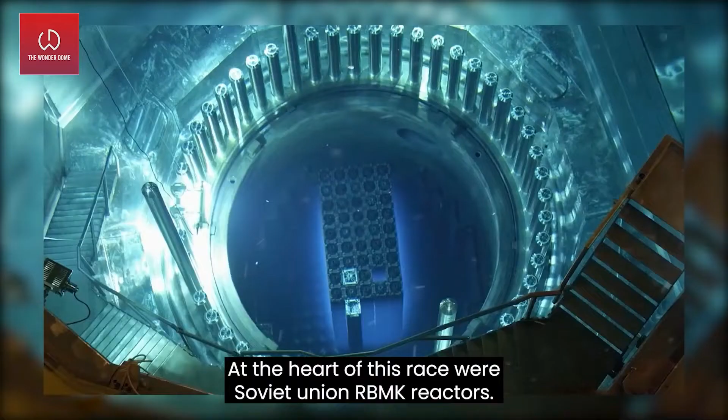At the heart of this race were Soviet Union RBMK reactors. These reactors used graphite for the nuclear reaction and water to cool down the core. At the time of the accident, the Soviet Union was using 17 of such reactors.

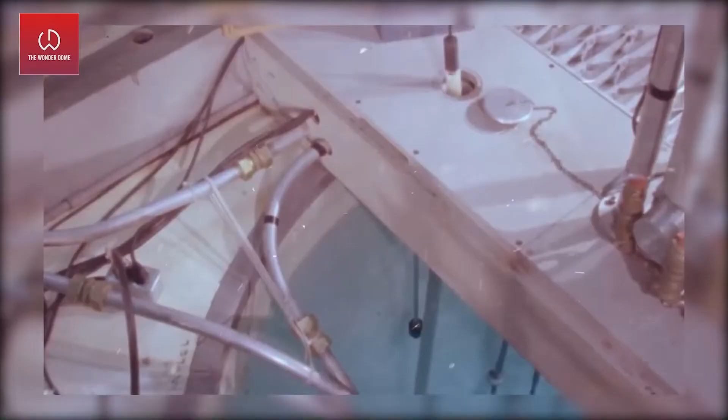On 26 April 1986, reactor number 4 in the Chernobyl Nuclear Power Plant near the city of Pripyat in the north of Ukraine blew up with a loud blast. At that time, the reactor was undergoing an experiment or a test. The plant was being run on only 7% power.

The test was being carried out to determine how long turbines would spin and supply power to the main circulating pumps, following a loss of main electric power supply. A series of factors, inadequate training of operators and faulty design of the reactor, contributed to the worst nuclear meltdown of human history.

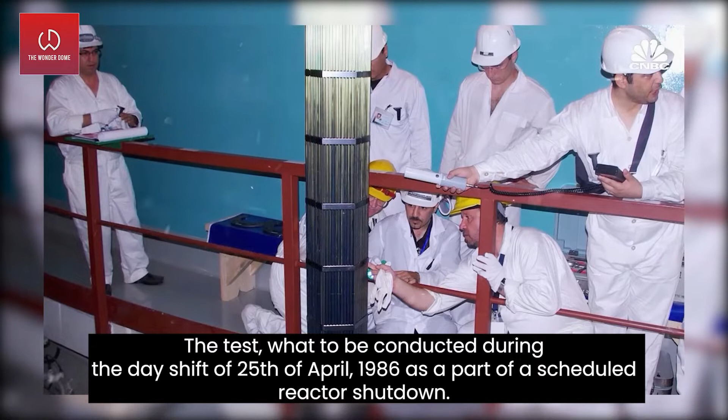The test was to be conducted during the day shift of 25th of April 1986 as part of a scheduled reactor shutdown. As planned, a gradual reduction in the output of the power unit began at 1:06 a.m. on 25th April, and the power level had reached 50% of its nominal 3,200 megawatt thermal level by the beginning of the day shift.

The day shift was scheduled to perform the test at 2:15 p.m., and preparations for the test were carried out, including the disabling of the emergency core cooling system.

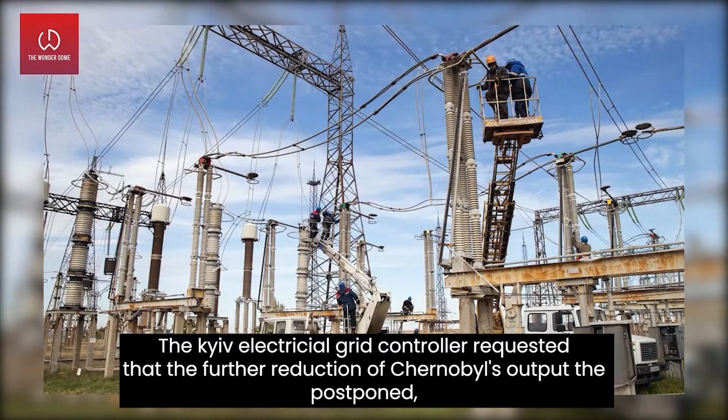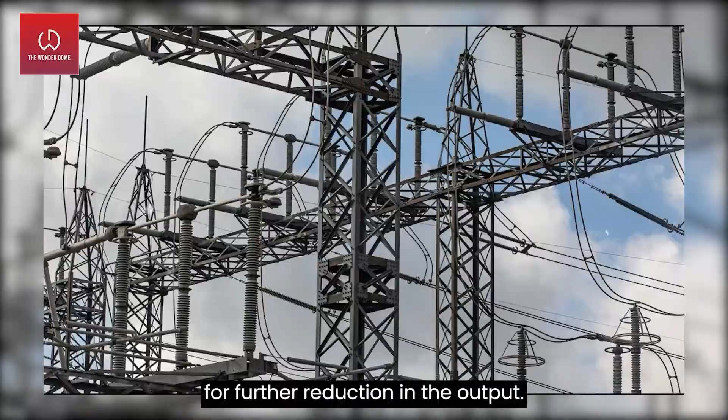But as nature would have it, another regional power station unexpectedly went offline at 2 p.m. The Kyiv electric grid controller requested that the further reduction of Chernobyl's output be postponed as power was needed to satisfy the peak evening demand, so the test was postponed. It was not until the night shift joined that the Kyiv electrical grid allowed for further reduction in output. All this time, the reactor was working without its emergency core cooling system and at a reduced power.

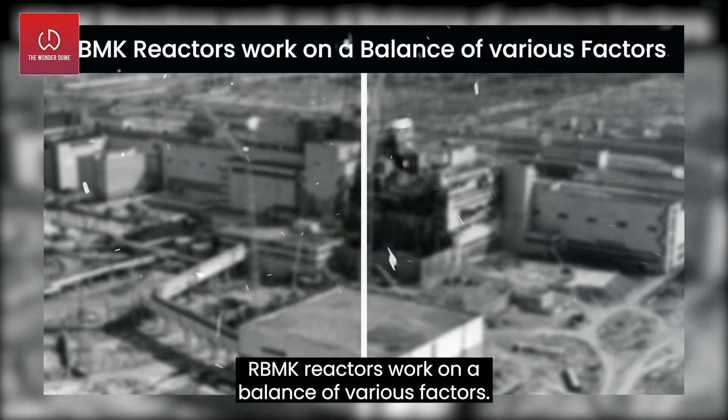RBMK reactors work on a balance of various factors. On one side, there is nuclear fuel and its reactivity. On the other side, there are boron control rods to control the reactivity, essentially bringing balance to the system and working as brakes to the nuclear reaction. Then there is a third element, water, to keep the reactor cool and functioning.

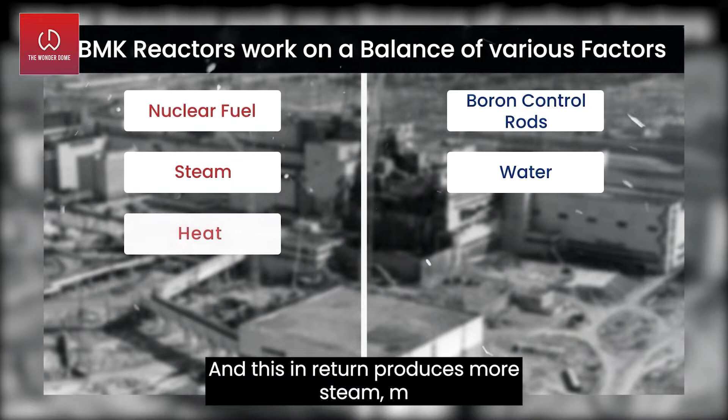This water produces steam, which is called positive void coefficient, and this in return produces more steam. More steam means more heat, and more heat means more reactivity, and so on.

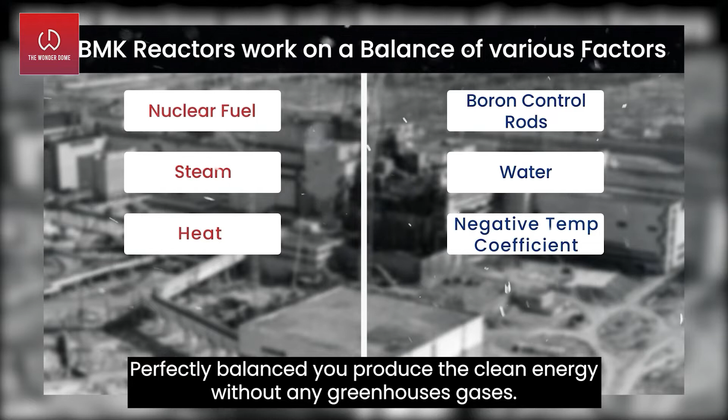Then there is negative temperature coefficient. It means when the nuclear fuel gets hotter, it becomes less reactive. So the fuel increases reactivity, boron rods and water reduce it, steam increases it, and rise in temperature reduces it. Perfectly balanced to produce clean energy without any greenhouse gases.

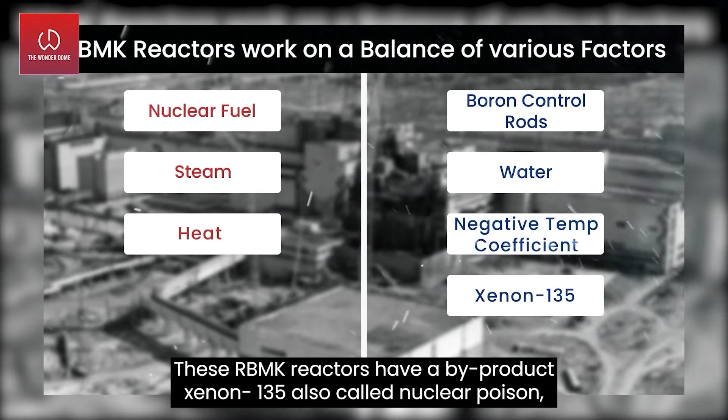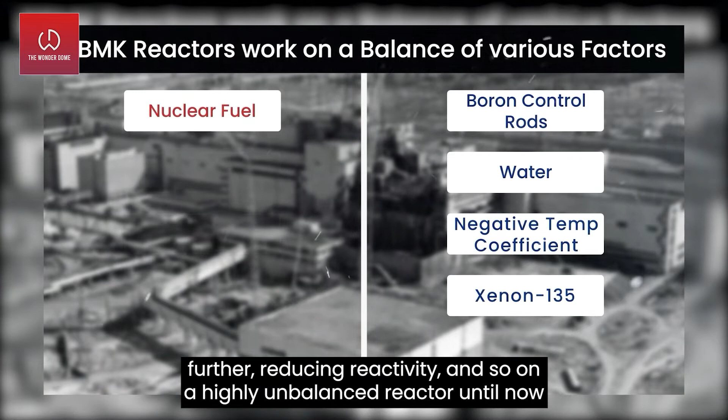A beautiful balance indeed. These RBMK reactors have a byproduct, xenon-135, also called nuclear poison, which in normal circumstances is burned through the nuclear reaction. Xenon reduces the reactivity, but as the power plant was working at reduced power since the day shift, xenon was in the system, unburned, disturbing the balance. Because of the poison, the reactivity slows down and the reactor is not hot enough to produce steam, further reducing reactivity and so on. A highly unbalanced reactor until now.

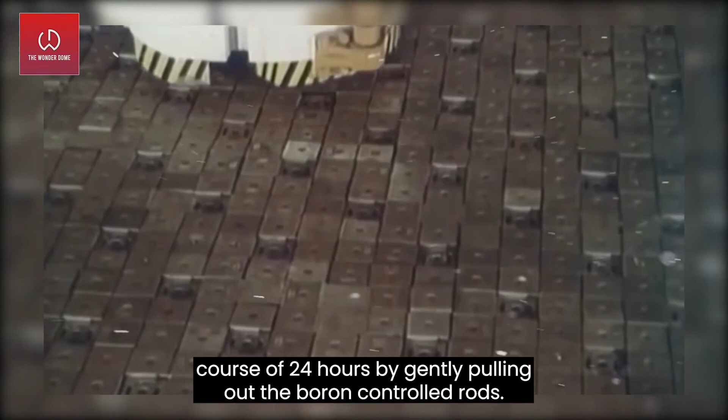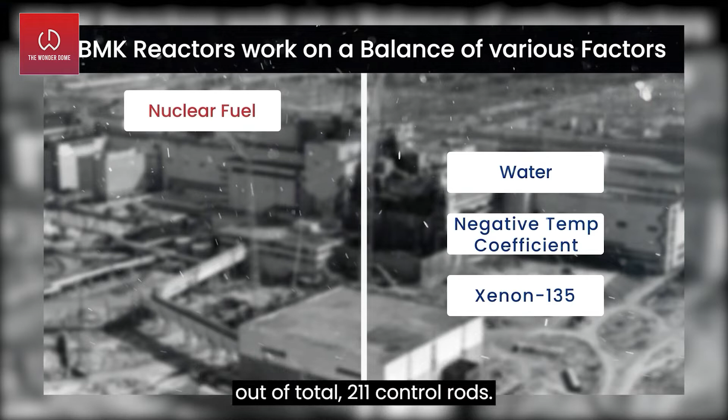The only way to increase power at such a stage and bring back the balance was to do it very, very slowly, over the course of 24 hours, by gently pulling out the boron control rods. The operators, instead of doing it slowly, pulled out immediately 205 out of a total 211 control rods. The brakes of the reactor now pulled out.

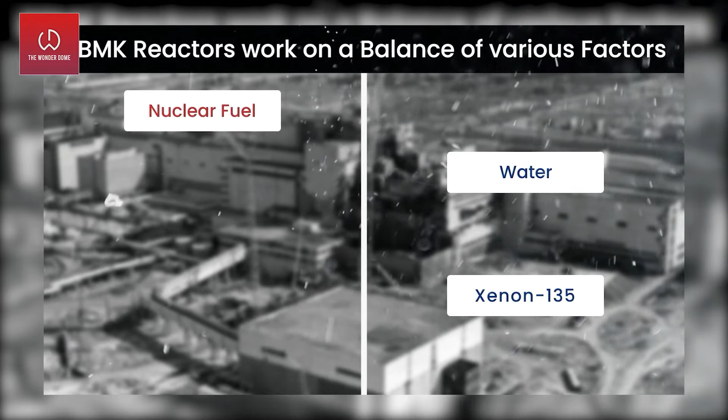As the fuel got cold, the negative temperature coefficient is no longer in the reactor. The only thing keeping the reactor checked is water and xenon. As part of the test, the water pumps are now shut down. The emergency cooling system is already shut down, pulling the water out of the equation from a highly unstable reactor. Nuclear fuel is now totally unchecked. Remaining water in the system is turned into steam, which in turn produces more heat, and it produces more steam, and the resulting vicious circle is creating a destructive level of imbalance.

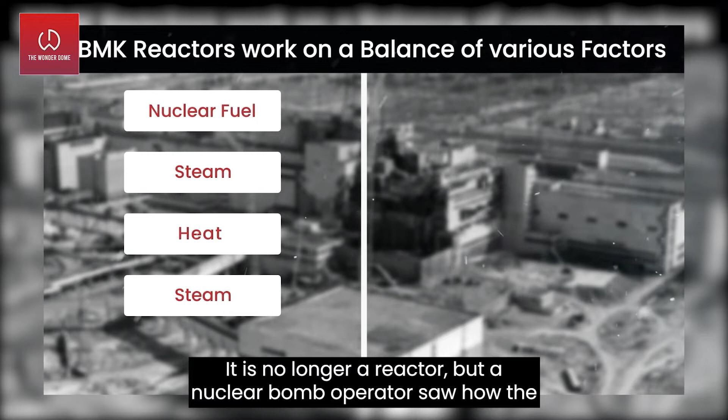It is no longer a reactor, but a nuclear bomb. Operators saw how the reactor had gone out of their hands. They decided to press the AZ5 button, the abort button. It means complete shutdown of the nuclear reaction by inserting all the boron control rods back in the reactor at once.

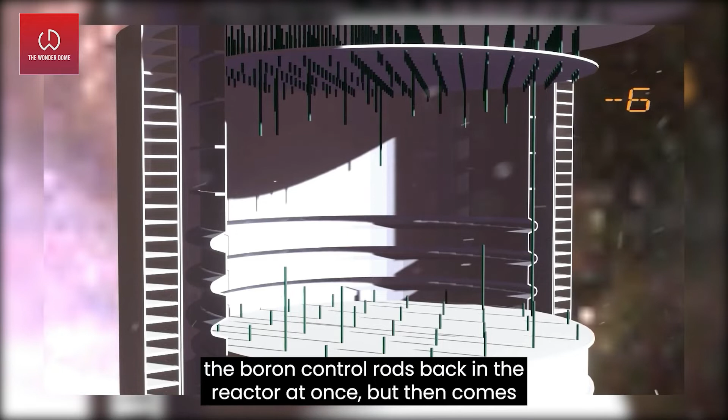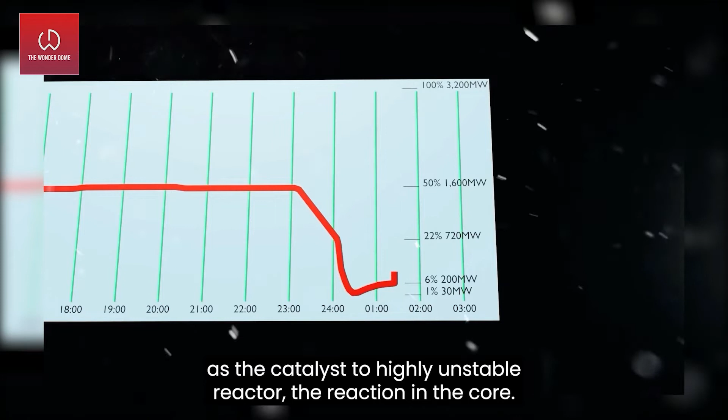But then comes the design flaw of RBMK reactors. The tips of the boron rods are made of graphite because it is cheaper that way. Graphite increases the reactivity, and as soon as the AZ5 button is pressed, the graphite tips worked as the catalyst to a highly unstable reactor. The reaction in the core skyrockets, and boom.

Up to 30% of Chernobyl's 190 metric tons of uranium was now in the atmosphere, and the Soviet Union eventually evacuated 335,000 people, establishing a 19-mile-wide exclusion zone around the reactor. At least 28 people initially died as a result of the accident, while more than 100 were injured. The United Nations Scientific Committee on the Effects of Atomic Radiation has reported that more than 6,000 children and adults developed thyroid cancer after being exposed to radiation from the incident.

What remains of the reactor is now inside a massive steel containment structure, deployed in late 2016 through the cooperation of G7 countries. Containment efforts and monitoring continue, and cleanup is expected to last until at least 2065.